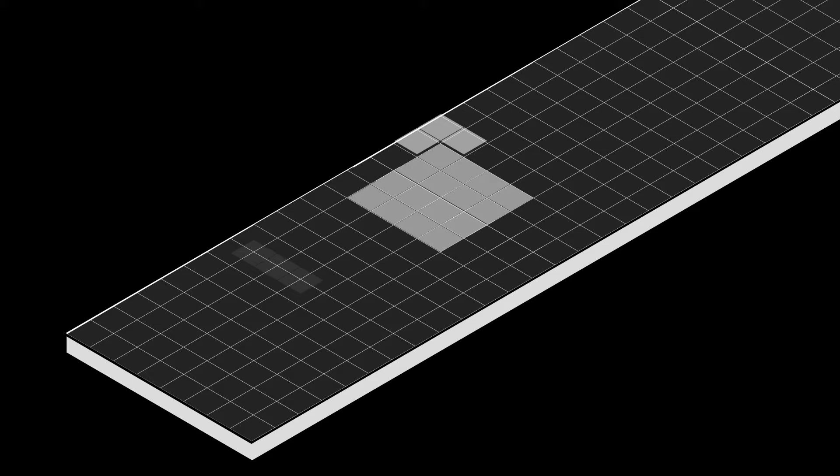In architecture, we speculate on an appropriate size of a space. This way, we can create the conditions necessary for a person to do a thing or two in a possible future. In response, we also condition the way people walk around: create enclosures by placing walls, provide openings to let people enter or exit. Organization is the key to decide if people can move along and interact with each other, and how a space can be used.

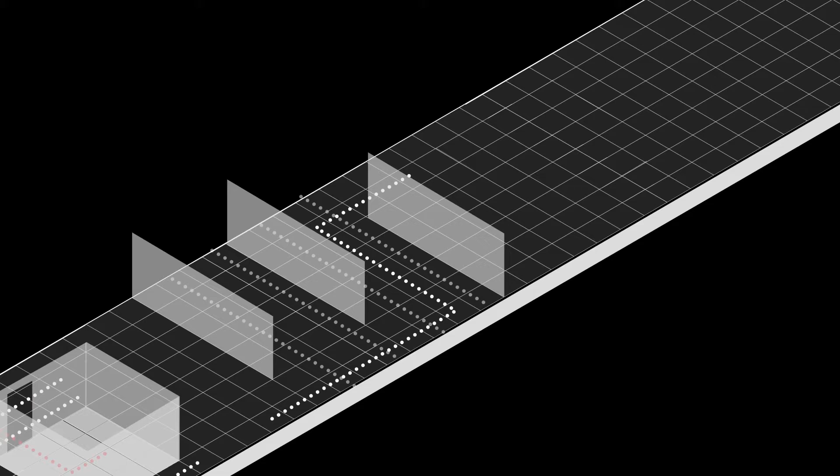In some circumstances, an enclosed space can result in unwanted acts. But as an architect, you can design it to be safe. We can provide a strong structure that can be an opportunity to build skywards.

As architects, we use our expertise for those that pay us, who often want to create conditions that define what tasks others should do.

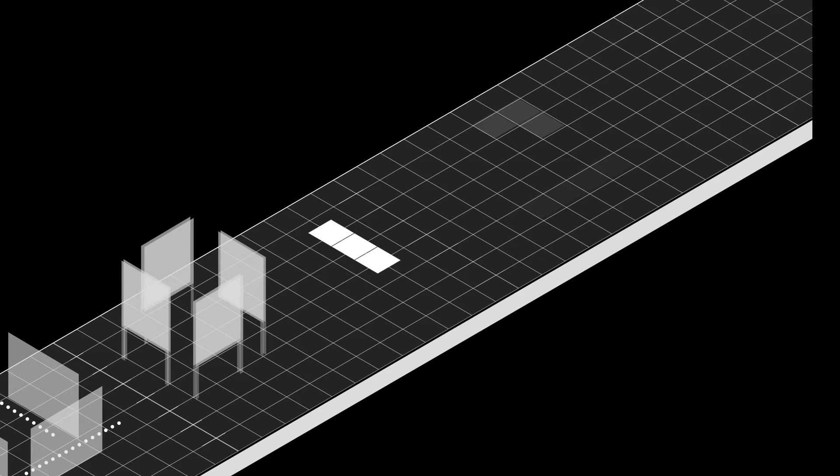But what do you think of public space? Shouldn't we keep the future use of a space open for the people to decide how they want to make use of it and what kind of infill they think is appropriate? Let them decide whether we organize a space in 2 parts with 2 entrances, or rather with 4.

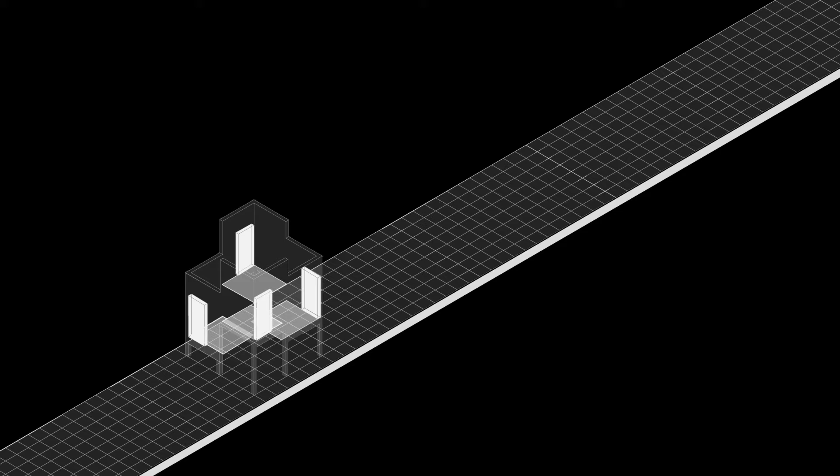What do people want to use to get from one floor to another? Would people like small buildings, or would they choose to connect multiple structures and make a larger one? Would they sacrifice part of their inside space for plants and to experience the weather?

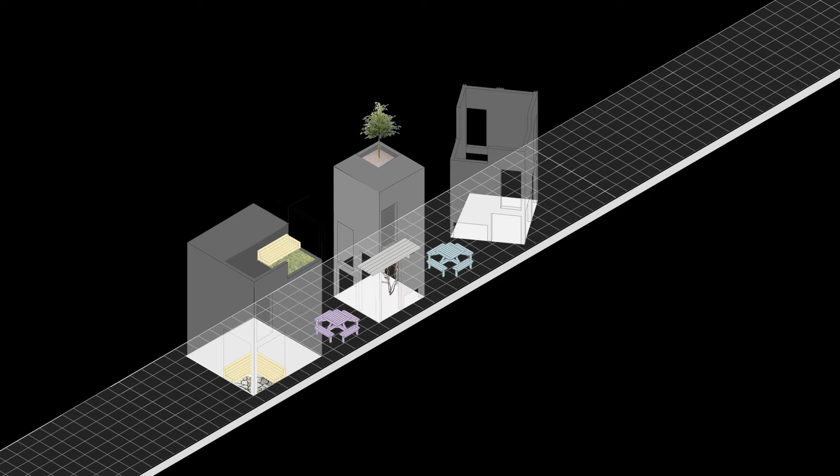What would work better, straight outside spaces or whimsical spaces? Do they want an opportunity for personal expression that they can share among fellow citizens? How do they want to move from one place to another? How would they choose to engage with the virtual domain?

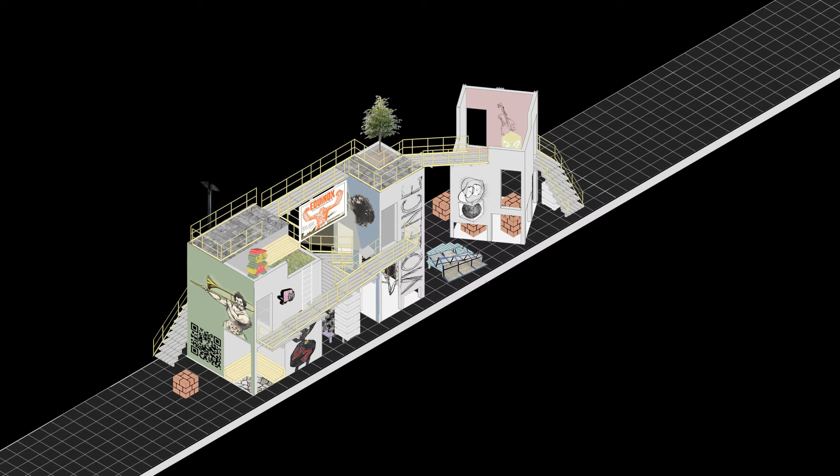We as experts don't know what the public wants in the future. Therefore, we design a public space to our personal tastes, under the banner that this would keep it clean and safe. This project critically responds to this notion, begging the question: does an architect need to express herself or himself in everything to provide order in public space?

Concrete is a material that will sustain itself for hundreds of years. With the help of only a few precast concrete shapes, a whole array of types of structures can be put together.

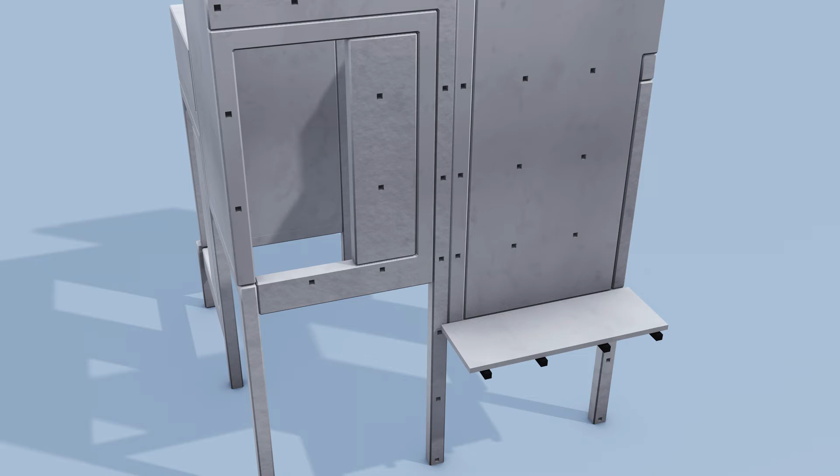Additions need to stand strong. Every expansion will be assessed by a civil engineer. When exterior space becomes interior, there's also a climate advisor to give an evaluation.

This project will stand strong, while the opinions and additions of the people will change. With the horizontal grid, organization is easy. With its help, an architect performing as a spatial curator can control what can and can't be done.

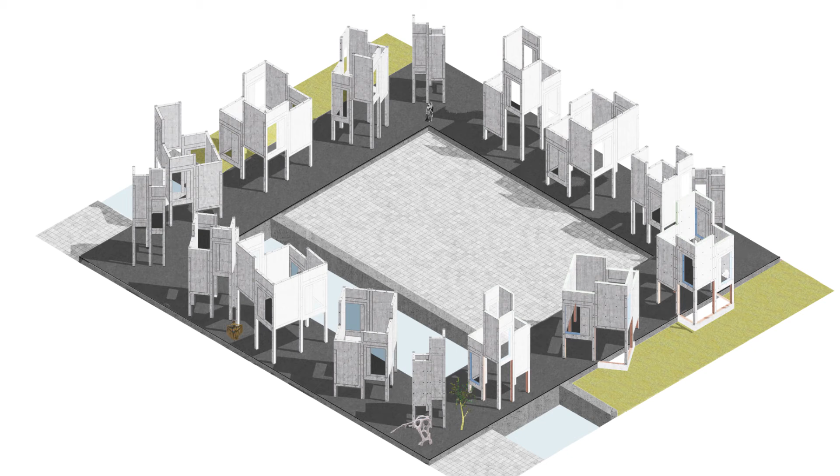The openings will work as frames for projects in or between them. The architect as curator performs his duty much like a president, as the one in charge.

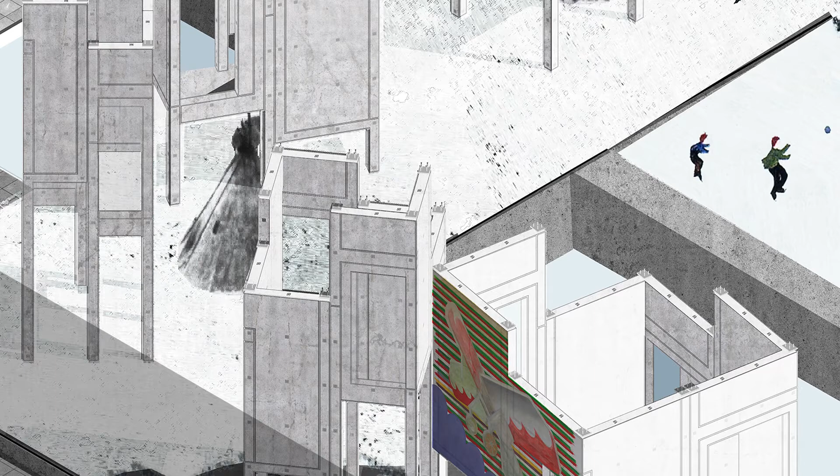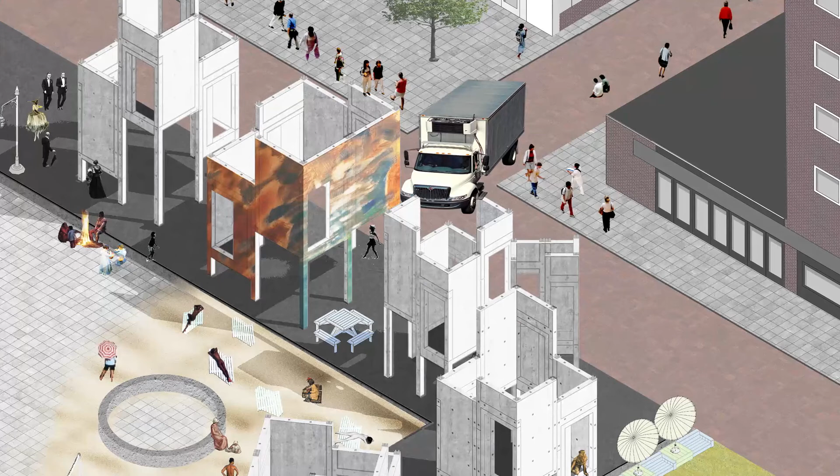A person chosen by the people, for the people. Working with and for a collective of citizens that can be joined by anyone in the city. Approved by the government, the curator is granted executive powers on this plot. But because she or he is working for the collective and not for the government, there is a direct link between the people and public expression.

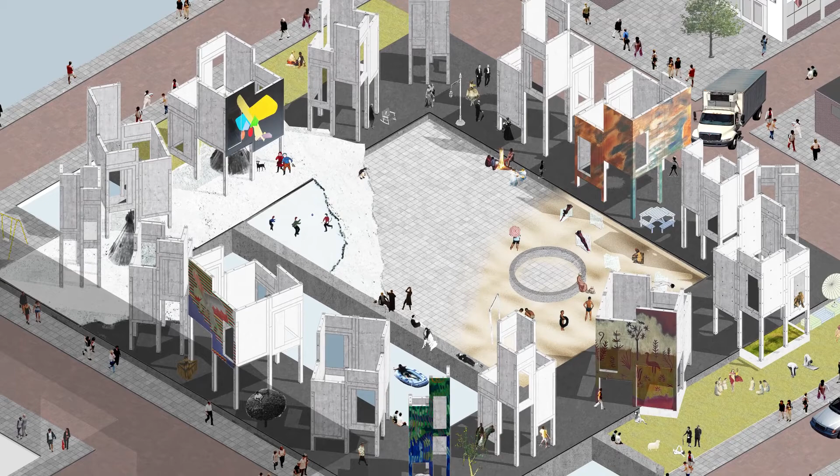Away from the rhetoric and bureaucracy of a public office, this project will work as an experiment, as a critical display, but most of all as a place for the people to learn of and engage with other people.

Project Beta may seem itself like a foreign object in the city. But surrounded by buildings of 4 and 5 stories, it does relate to its scale and atmosphere. It may look foreign, but it is designed to strengthen the qualities of the area.

When Project Beta is received as a success and people evaluate public space as something that they can participate in, there likely will be 2 distinct conclusions that influence its expansion.

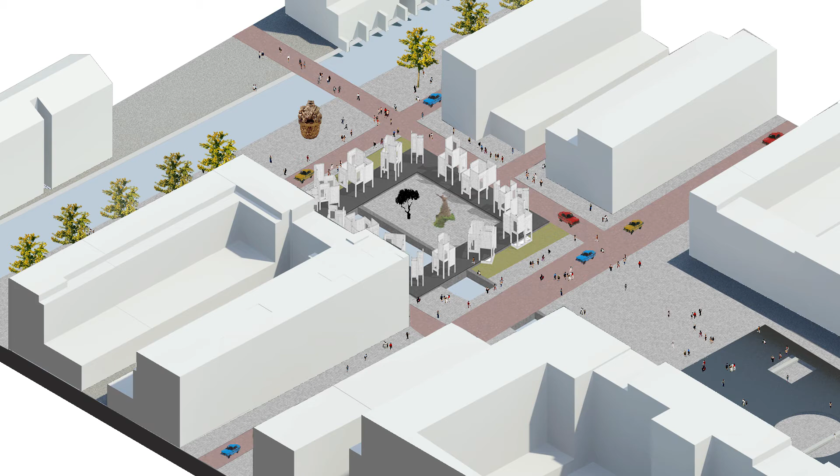Type 1: The beta structures were found to be too dominating. People enjoy the empowerment and would now like to build from scratch. The curator takes a step backwards and will merely advise and organize the iterations of projects.

This type responds to the huge impersonal buildings that distance themselves from the binnenrotte and any engagement with it. The small autonomous shapes that will likely be constructed can only be understood as shapes that act in self-defense of a more personal and social public space.

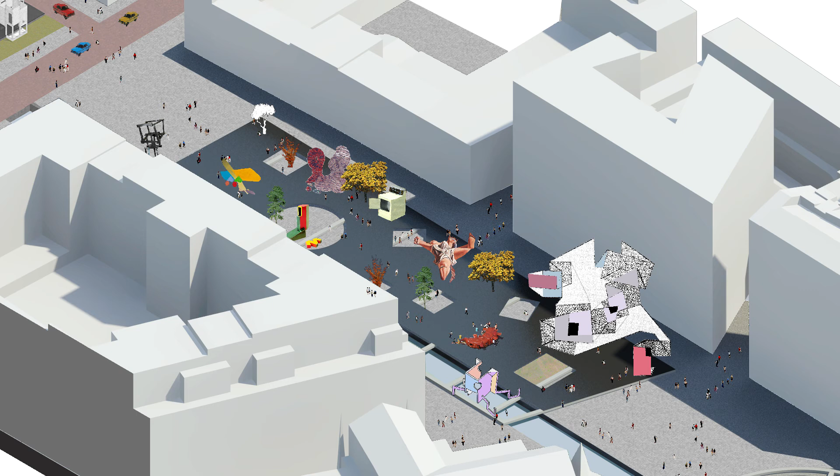Type 2: The structures proposed in Project Beta were found to be too separate. There's too much facade to be sustainable in the Dutch climate. People agree, the spatial constraints need to be more tight. To adhere to a bigger plan, taking part means to contribute.

And climate design needs to be an integral part of any addition. As a social project, Type 2 would fit the many other idealistic icons that lay around the same square. Taking them head-on, it can proclaim to be the most valuable type of architecture for a civil society.

What is different about this project? I never set out to make architecture, or even to practice like an architect. It is the result of looking at why we are practicing the way we do through a history of practice.

After hypothesizing at what an aspect of our practice contributed to a specific time and place, I respond to it from a personal understanding of how it can be improved to reflect contemporary conditions and a specific context. Therefore, this project is no architecture, but the result of practicing critical architecture.